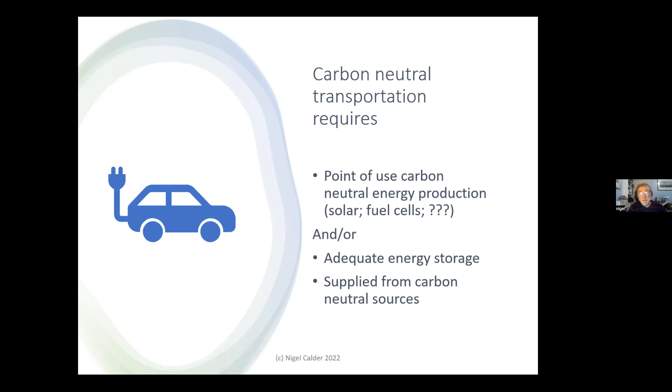So what does it take to get carbon neutral transportation? Well, you either have to produce the carbon neutral fuel supply that you need to move the car or the boat or whatever it is at the point of use, or you've got to supply it from carbon neutral sources and store it within the car or the boat. So at the moment, of course, with cars, we can store a substantial amount of electrical energy in lithium-ion batteries. And with some cars now, we can get a 300 or 400 mile range. But it's a lot different when we get to boats.

So let's get rid of that. There we go.

So the two huge differences between boats and cars are that when a car gets up to what you might call cruising speeds on the interstate, as long as it's not going uphill and as long as there's no headwinds, the loads are actually quite light. The energy is absorbed in getting up to those speeds, and then once you get there, you're coasting. A boat is entirely different.

It takes less energy to get up to cruising speeds than it would in a car, but as you get closer and closer to cruising speeds, the energy demand just keeps going up and up and up. So once we get to cruising speeds, the energy demands are really high. So that makes it very difficult to store enough electrical energy on a boat to operate at cruising speeds for any length of time.

And then in the car, every time you brake, you can recover some of that energy and turn it back into electricity and store it in the batteries. In a boat, we effectively have no regenerative braking. So those two things together amount to a radically different duty cycle for boats, which makes it extraordinarily difficult to store enough electrical energy on a boat to have any kind of range whatsoever.

Now, we can electrify all kinds of short-range boating activities. If, for example, you have a sailboat and you only use the engine to get out of the slip, and then you go sailing and then you use the engine to get back into the slip, then it's entirely feasible to electrify the boat, to take the diesel engine or the gasoline engine out of the boat and put an electric motor in there on a reasonably modest battery bank and get in and out of the slip.

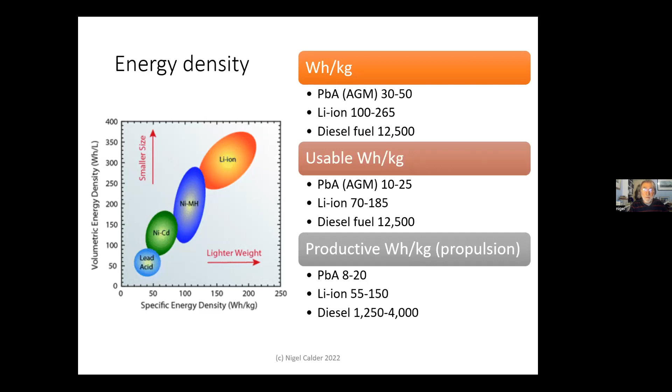Is this too much for this time of night?

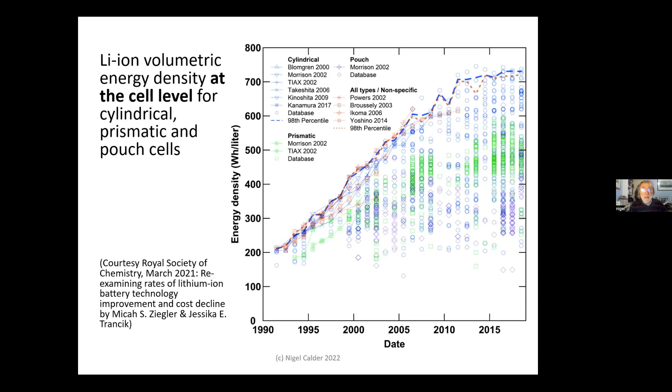With lithium ion, the efficiency has just been climbing steadily for years. And that's what this graph is showing. So for a given size of cell, we're getting over twice the energy density that we got just like 10 or 15 years ago. But if you look at the top end of the graph there, you can see it's beginning to flatten off. We're starting to get fairly close to some of the theoretical limits of what we can do with lithium ion.

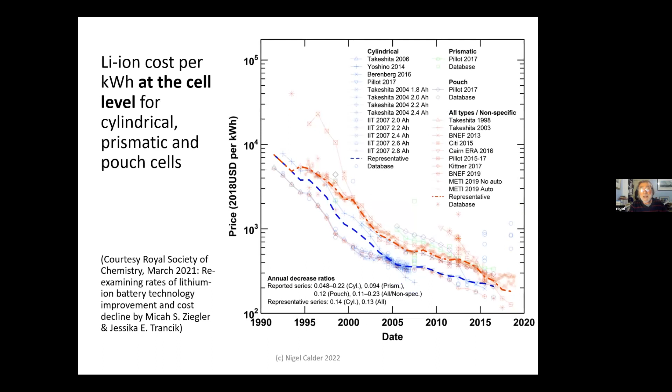So if you go out with a boat and you run your battery almost flat and you come back to the dock and you need to recharge it, it's going to take you 3 hours to recharge it. As opposed to if you have a boat with a diesel or gasoline engine, you come into the dock and it takes 5 minutes to refuel. So there's a huge difference there in the time it takes to put the energy back in the boat.

And then there are other factors like cycle life and operating costs, which we can quantify in different ways. And the cost of maintenance with electric boats, it's basically close to zero, as opposed to fairly high with gasoline and diesel engines. And then, of course, there are lifestyle issues. Most of the boats that I deal with that want a significant level of electrification, they're actually not worried about the cost. It's the noise and the emissions that they want to get away from. So they'll pay a lot of money for a lifestyle improvement, which is unrelated to other issues that we've got there.

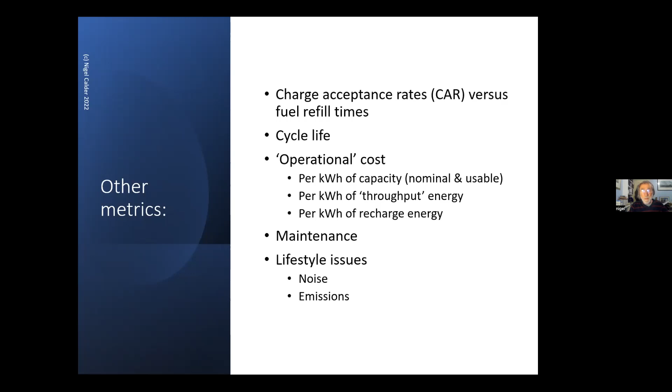And then we need a shoreside infrastructure that's capable of charging a 120 kilowatt hour battery pack overnight. That's a pretty high charge rate. In terms of your household energy use, that's probably kind of like running a dryer continuously. Your dryer is plugged into 240 volts. It's pretty similar to that, running it all night long. So we're talking a fair amount of energy being pumped back into the batteries. We can either do this with fast charging stations, which requires even bigger energy supplies, basically huge energy supplies, a level which none of us could do at home. We simply don't have that much energy available.

Or else they're finding in some of these situations, they have to fill a container with batteries. So they've got an enormous bank of batteries. They park it on the dock side. The boat comes in, the tour boat, plugs in and recharges fairly quickly from the batteries that are in the container. And then they recharge the container overnight from the grid when most people are in bed and their loads on the grid are much lower. But all of this, of course, adds a lot of cost and complexity to the process, which we're going to have to address once we get into more electric boating.

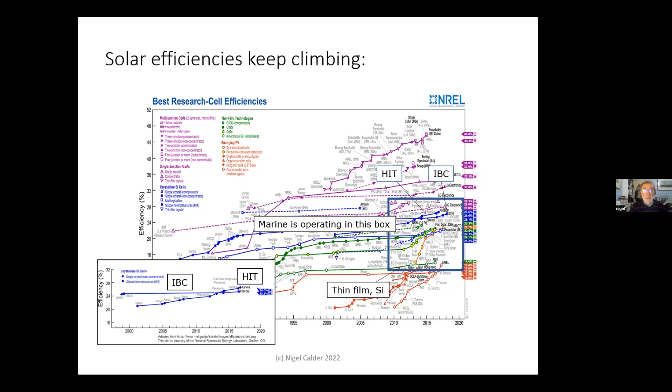I'm not sure that we're going to see the same rate of improvement in coming years, but in the lab, they actually have solar panels that are almost 100% more efficient than what we have right now. So maybe we will see that kind of rate of improvement over the next 10 or 15 years. This still won't get us where we need to be in terms of propulsion loads, because when we're at cruising speeds, the loads are always high.

If you take my own boat, it takes 7 kilowatts to move the boat at 6 knots in flat water with no headwinds. So for 2 hours, that's 14 kilowatt hours of electricity. 22 square feet of solar panel area, roughly speaking, will generate about a kilowatt hour a day of electricity on a boat, given shading and other issues.

So to power my boat for 2 hours at 6 knots, I'm going to need 14 times 22 square feet of solar panels on the boat, and there's no way I could fit that on the boat. And that's the case for most boats.

So there's... let me just stop. Sorry about that. Yep.

So even on a catamaran, if you cover the entire deck with solar panels, typically speaking, you can't move the boat at more than 3 or 4 knots. That's when the sun is shining. And then obviously overnight, you don't have the electrical energy you need to move the boat with an electric motor.

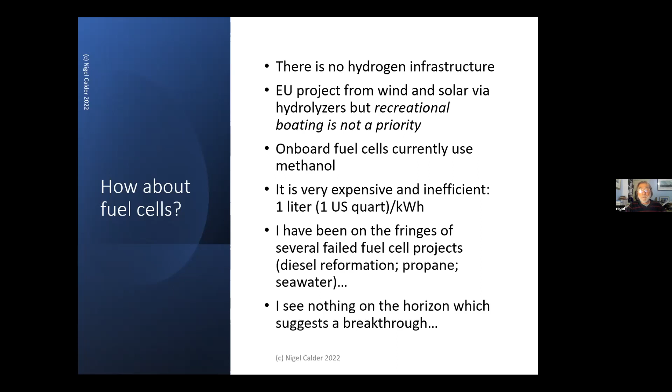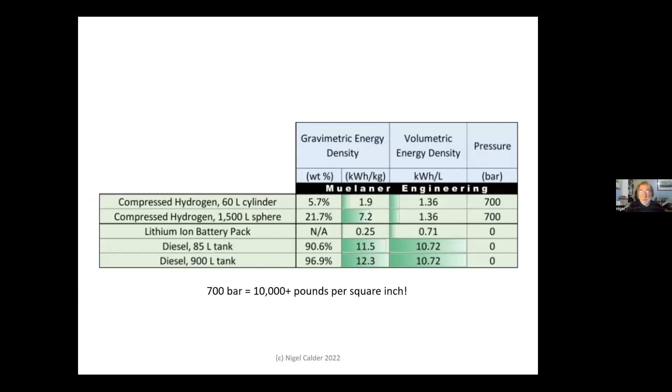In the shipping world, we're going to see some hydrogen for the zero pollution areas because the ships are going from one port to another, so they can create the infrastructure at both ends to deal with it. And I've got a slide here which deals with the energy density of hydrogen compared to diesel. And again, the bottom line is it doesn't look very good.

So away from the dock, fossil-free electricity is not practicable for sustained propulsion. It is for short-range propulsion, but it's not for sustained propulsion. And even for house loads, if you've got significant house loads, if, for example, you want to run air conditioning on a boat, it's almost impossible to do that from fossil-free energy sources, mostly solar. So we're driven back to using what we're using right now: alternators, battery chargers at anchor, generators, and so on.

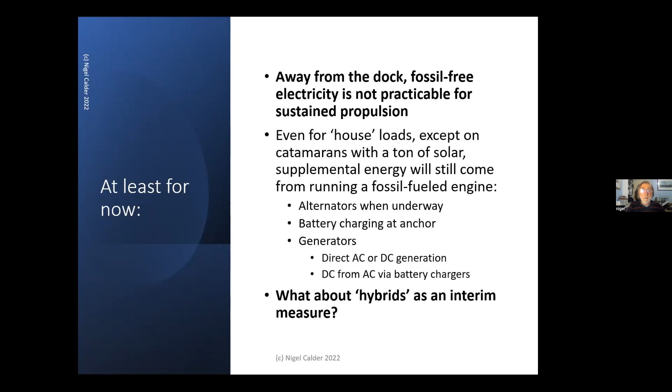We've got, as a kind of interim technology, which theoretically improves efficiency substantially, hybrids. We have two types of hybrids: serial and parallel. The goal with both of them is to restrict fossil fuel use, engine run time, to as little as possible, and then to make sure whenever an engine is running, that it's operating at peak efficiency. So our carbon footprint per unit of energy produced is as low as we can make it with that particular engine. And then if we can't run the engine at peak efficiency, we run off batteries in the interim until the batteries go down, and then we recharge the batteries and we make sure that the load on the engine is such that we put the engine at peak efficiency. And we have two ways of doing this. One is called a serial hybrid and one is a parallel.

So a serial hybrid, we put a big electric motor on the propeller shaft, which is what we can see on the left-hand side there. And then we have a generator in the background. And we run the electric motor off the batteries until they go down, and then we crank the generator, and we make sure that the load on the generator puts it at its peak efficiency, so that we minimize the carbon footprint for the energy we're creating.

With a parallel hybrid, we have the engine connected to the propeller shaft as we normally would, and then we add an auxiliary electric motor. And anytime we've got low loads, we operate the electric motor when we want low speed propulsion in harbor and getting in and out of slips and so on. And anytime we need more energy for propulsion, we crank the engine and we run the engine, at which point it's reasonably efficient. So those are the two systems we have.

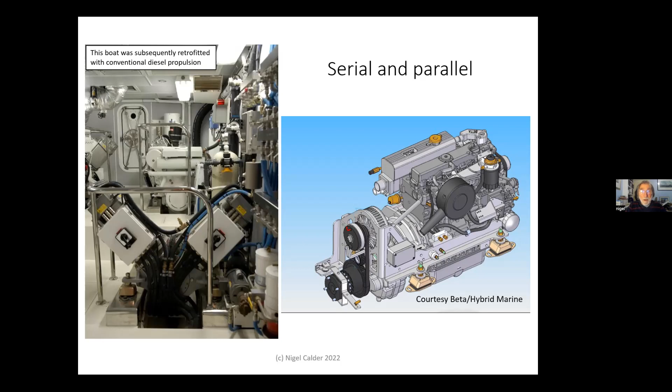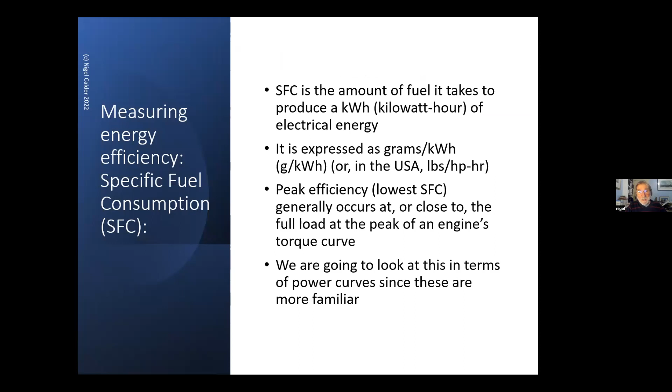I think I'm going to skip these next two slides. It gets a little too technical for this. I think for the time we've got and the evening time we're at, I'm just going to get to the core here.

With a serial system, once the batteries go down and you fire up the generator to recharge the batteries and to provide electrical energy to the propulsion motor, you've got serial losses. You've got losses in the generator, you've got losses in the cabling, you've got losses in the device that controls the motor, and you've got losses in the motor. And these all add up.

The net result of this is that if you are running the engine, the generator, to provide electricity for the electric motor, we've discharged the batteries and now we've got the generator running. As soon as you crank the generator, that system is less efficient than if the engine that's driving the generator had been connected to the propeller shaft in the first place. This is not what anybody wants to hear. But that's the reality with these serial systems.

If you can, most of the time, run on batteries, you do just short trips. You go in and out of the slip and you recharge from the carbon neutral shore power energy. And you only intermittently run the generator when you do make a longer trip once in a while. Then the serial system looks pretty good.

But if your regular duty cycle requires you to fire up the generator so that you can extend the range of the boat, you would be better off having a conventional system in the first place, from an efficiency perspective and from a carbon footprint perspective.

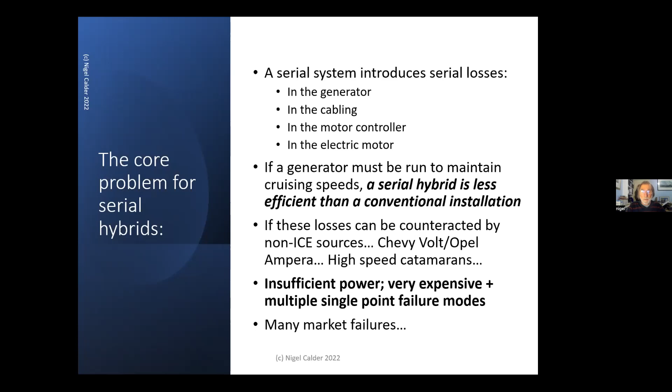So there are a lot of issues in terms of trying to reduce the carbon footprint with serial hybrids, which make it very difficult to do it. There's an awful lot of nonsense talked about improving efficiency with these systems, and unless they're very carefully calibrated for a very specific duty cycle, many times they're less efficient than a standard installation.

The parallel hybrids actually offer much more opportunity for modest improvements in efficiency and reductions in carbon footprint, because you have a much smaller electric motor. It's not required to drive the boat at all speeds. It's only required to drive it at low speeds. And then the engine in the boat is used for going at cruising speeds.

So all of those times when the engine is really chronically inefficient, we run the boat on electric propulsion through the parallel hybrid motor. And then anytime the loads get to be fairly high, we crank the engine, at which point it's fairly efficient. And we also use the engine at that point to recharge the batteries, just as we do in a Toyota Prius. So we can optimize those systems in a way that we can't with a serial hybrid.

They've produced hundreds of these boats. They have a parallel hybrid in them. But they basically have a switch in there. If you want electric propulsion at low speeds, you flip the switch to electric propulsion. And if you want to go faster, you flip the switch to diesel engine.

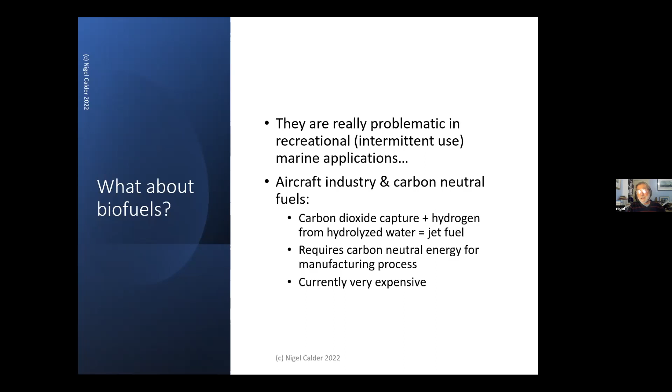And I got 2 more slides here, and then I'm going to wrap it up, Alicia, because I know we're running out of time.

So those few barnacles are disrupting the flow over the surface of the propeller and making a huge impact on the efficiency of the propeller. So imagine what it's like if we had a lot more fouling of the prop.

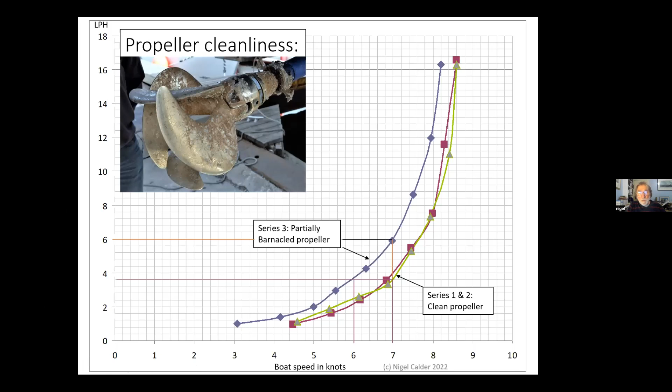And that's because although as we speed up, the engine becomes more efficient as we load it more heavily, with that whole hull resistance curve that I started out with, when we get to cruising speeds in a boat, the loads are really high, and that resistance is going up faster than the fuel efficiency is improving. So we're burning more fuel per mile traveled the faster we go, even though the engine is 3 times as efficient as it would be operating at just above idle speed.

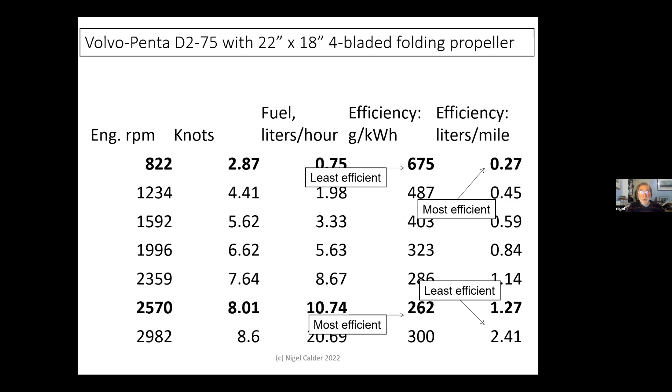So the bottom line here is that if you really want to save your carbon footprint right now with existing technology, you need to clean the propeller and go slower. And then pending a major technological breakthrough, there's not a lot we can do right now to reduce our carbon footprint with our boating. Clean the prop and go slower.

Particularly going slower, if you drop your top speed by a knot or two, you'll probably reduce your fuel consumption per mile to a half. It makes a fairly radical difference. And then you reduce your carbon footprint substantially.

So that's what I have here. That's kind of a rather mixed bag of information. Let me get out of here and we'll see if we've got any questions. I hope that wasn't too much at this time of night. I just wanted to throw a bunch of ideas on the table so you can go home and think about it.

Nigel is fantastic. Fantastic.

Hey, I have a question for you. Have you written or can you recommend a guide for a boat owner who wants to replace a generator with solar for non-propulsion needs? So, to put solar in for non-propulsion? Well, there's a lot of quality panels on the market, semi-flexible, or you can use household panels if you're going to build a platform to put them on. But the key thing, if you're going to go for anything other than the solid household panels, because they're very well built, they have to be built to certain standards.